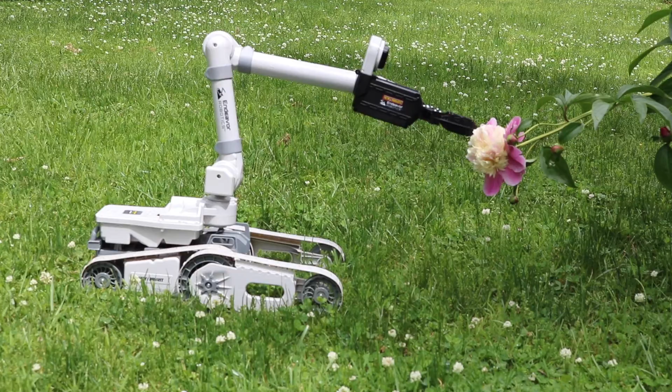Mobile robots often need to move from place to place in order to do their jobs. How do they keep track of the obstacles around them? How does this robot know what is around the corner before its sensors can see that area? The answer is that robots keep maps, so they can keep track of their own location and any obstacles that may be in their path.

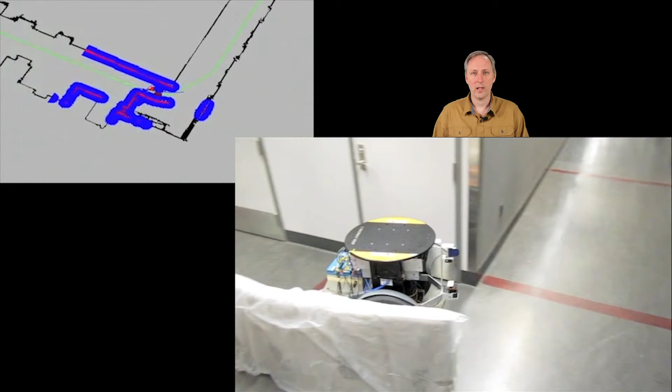In this episode, we will look at how robots sense obstacles and determine their locations, as well as how they store this information for later use. We'll do all this using the math you already know: geometry, trigonometry, algebra, and a few concepts from physics. This lesson will cover some ideas from probability, so you'll definitely want to take notes.

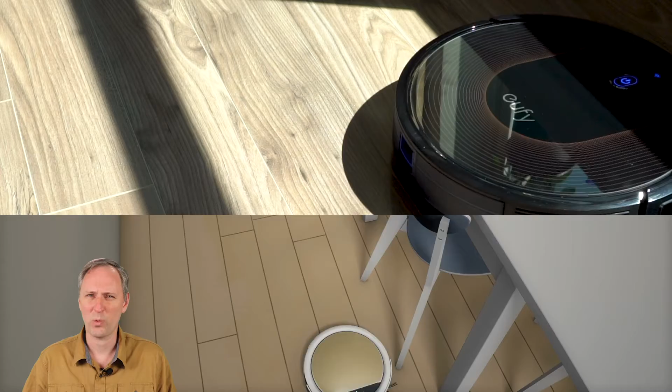Robots must be able to sense obstacles and store the location easily for later use. Robots working around the house need to avoid furniture and walls, and must remember how to get from the living room to the kitchen without having to explore the whole house.

In many cases, the environment will have some elements that change, and other elements that remain constant for long periods of time. For the house example, the walls probably won't move. The furniture will move only occasionally, and your brother or sister's junk will be in a different place every day. How do robots keep track of this?

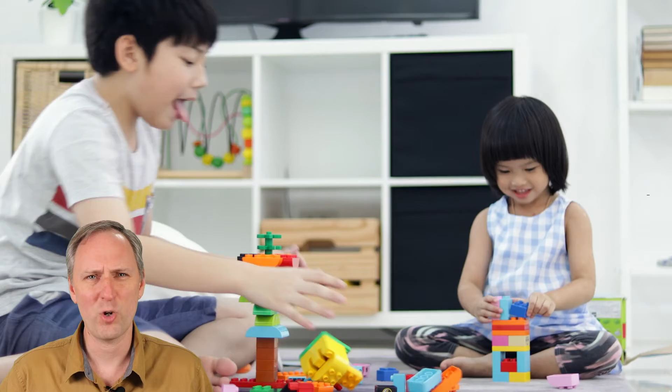Hey robot, did you get your stuff?

Let's start by talking about one of the common robot sensors, the Lidar, which stands for Light Detection and Ranging. In principle, this is similar to a radar, which uses radio waves. But with Lidar, the sensor will send out a pulse of light and measure the time it takes to get a reflection back, in order to calculate the distance to the object.

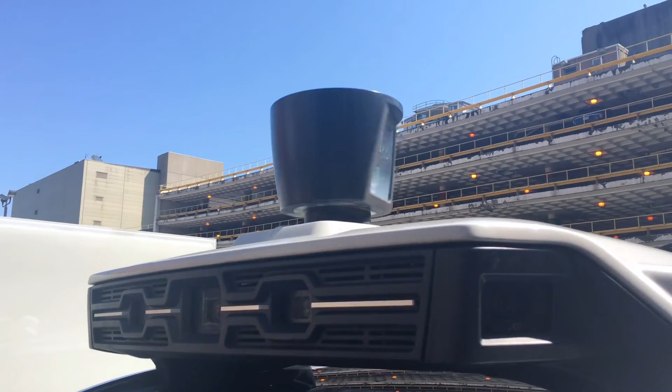Let's look closer at how Lidar works. The most common type of Lidar for robots is the scanning or rotating Lidar. This type of Lidar spins around at high speed, allowing it to rapidly get measurements in many different directions. If our Lidar system produces 4 pulses per revolution, it may tell us that there is an object 5 meters in front of us, 4 meters to the left, 3 meters behind us, and 10 meters to the right.

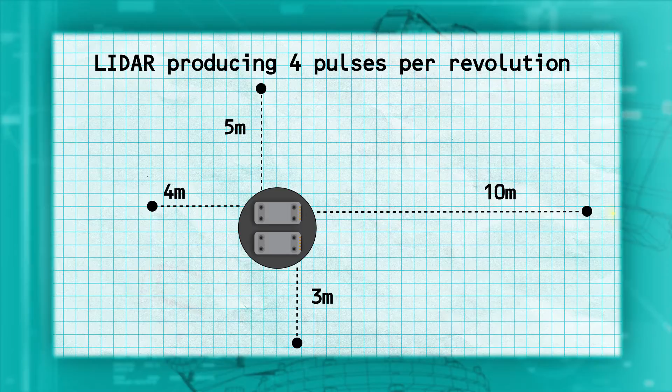However, most scanning lidars have many more than 4 pulses per revolution. A common low-cost lidar has more than 1,000 pulses per revolution. This results in a high resolution, which can allow scanning lidars to map the surfaces of complex objects and perform highly accurate surveys of such things as houses and other buildings.

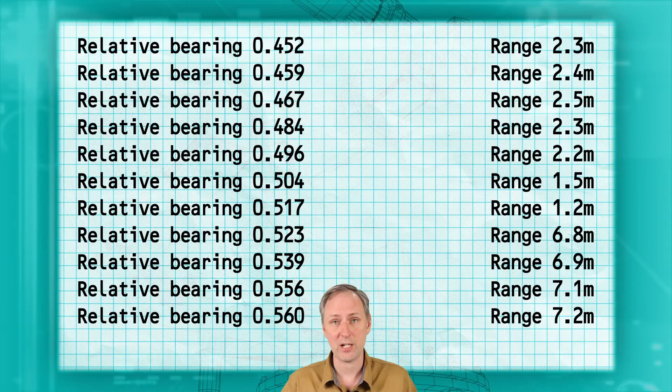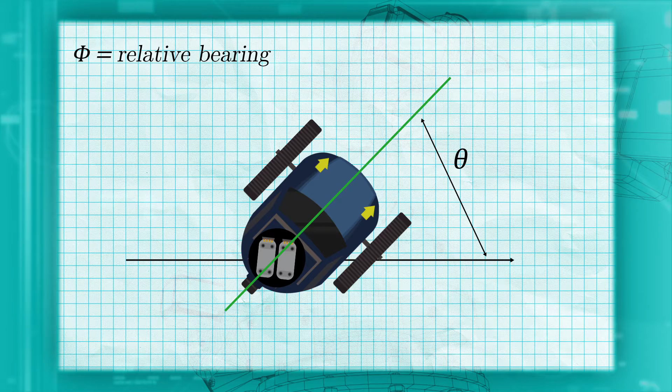What the Lidar produces for the robot is a list of directions, called relative bearings, and an accompanying distance in each of those directions. They are called relative bearings because they measure the angle between the robot and the object, rather than from some absolute reference, such as the x-axis. We'll use the Greek letter phi to refer to the relative bearings from the Lidar.

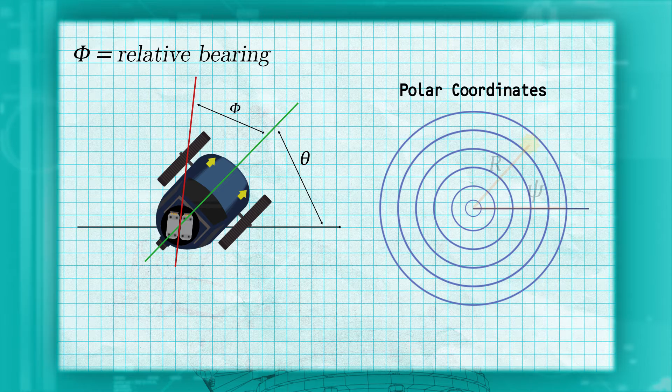The data from a scanning Lidar is essentially points in polar coordinates. If you remember polar coordinates, they consist of an angle and a range, exactly the same as the range and relative bearing the Lidar produces. As the robot moves around your house, it collects lots of measurements in this form, from all different types of objects.

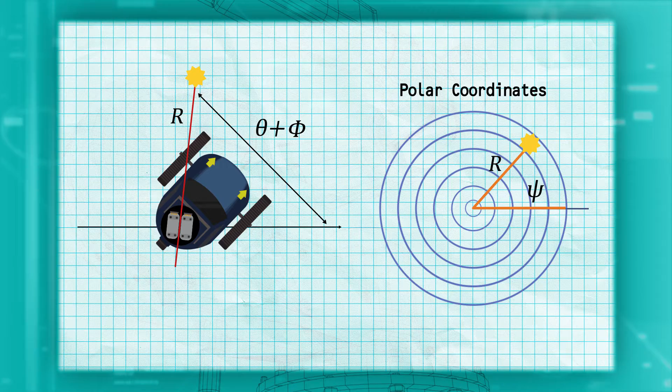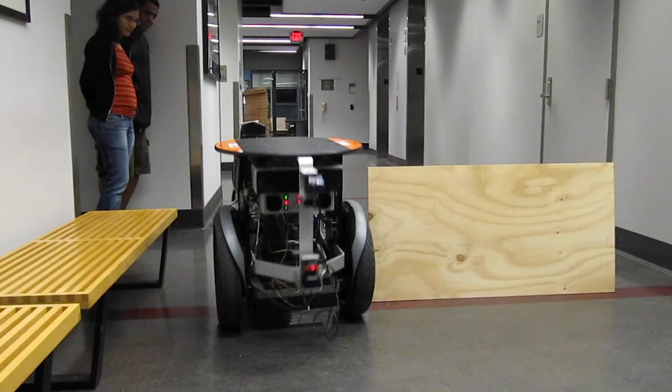But what does the robot do with this data? It could try to use it directly, stopping motion if the sensor detects an object in front of the robot within some minimum range, but that approach is better as a safety system, rather than a reliable method for long-term navigation. We need a way of storing the information the robot gets from each scan, so when it returns to the room, it remembers where the door and chair are, and that your sister's toys are still in the middle of the floor.

One way of keeping track of where things are is probably the method you thought of yourself. The robot should build a map, just like you would do mentally if you were trying to keep your bearings in someone else's house. You would keep track of where the walls, furniture, and other obstacles are located. The robot has a big benefit in this situation, since the Lidar is very accurate at measuring distances.

The way a robot makes a map is by dividing up the world into discrete chunks called cells. The robot treats each cell as a single unit. The cell is either all occupied or it's all clear, or possibly it's unknown, meaning the robot is unsure if the cell is occupied or clear. Using cells, the robot doesn't have to keep track of every single item in the room, only which cells are free and which are occupied.

If our robot senses a few objects to the north, how does the robot actually store this so it can use the data later? The easiest method is to simply store a grid. Imagine we make a grid with 50 centimeter by 50 centimeter cells. In our case, let's assume we had an object 10 meters away at a position of 6.1, 7.9. So we would mark the cell corresponding to the range 6 to 6.5 on X and 7.5 to 8 on Y as having an obstacle.

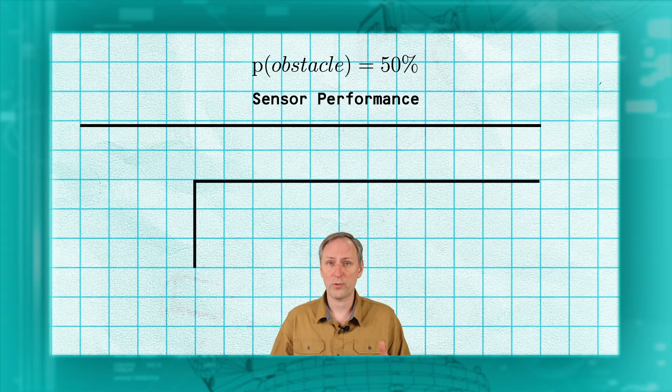One way to keep track of our belief that a cell contains an obstacle is to keep track of the probability. We will start off by assuming that any cell could either have an obstacle or not, with 50% probability of each. We will also need to know a little bit about our sensor capabilities, how likely it is to detect an obstacle, and how likely it is to correctly identify a clear cell. For any given part of the world, there either is or there is not an obstacle in it. Also, if our Lidar points at this cell, it will either get a return or it will not.

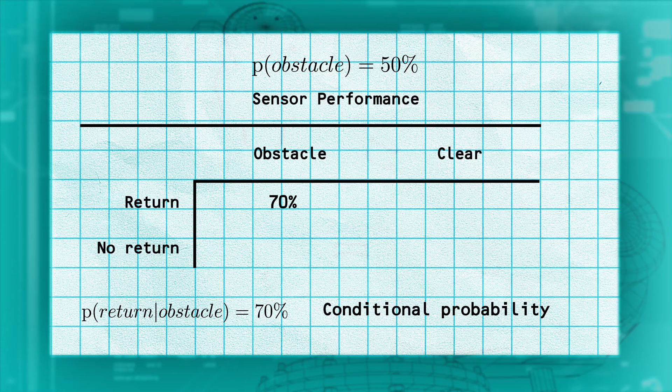Let's start with the cell that we know has an obstacle. Suppose our example Lidar will detect a return 70% of the time from that cell. We can write this as the probability of getting a return given an obstacle equals 70%. This is also called the conditional probability: the probability of getting a return conditioned on the fact that the cell has an obstacle. Since we either get a return or don't, the probability that we don't get a return from an occupied cell must be 100 minus 70, or 30%.

We can do the same analysis for a cell that doesn't have an obstacle. Suppose our Lidar will produce a return when there isn't an obstacle 15% of the time. We can write that as the probability of a return given a clear cell is 15%.

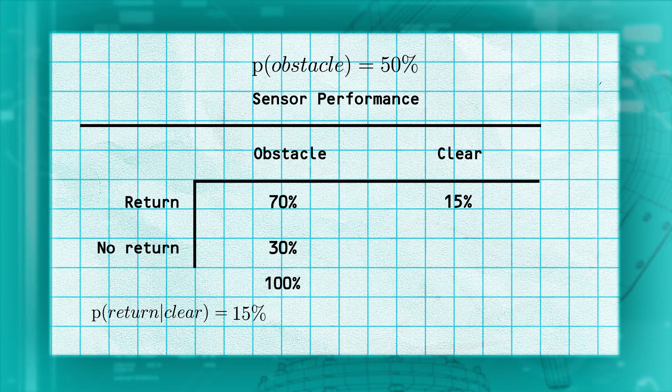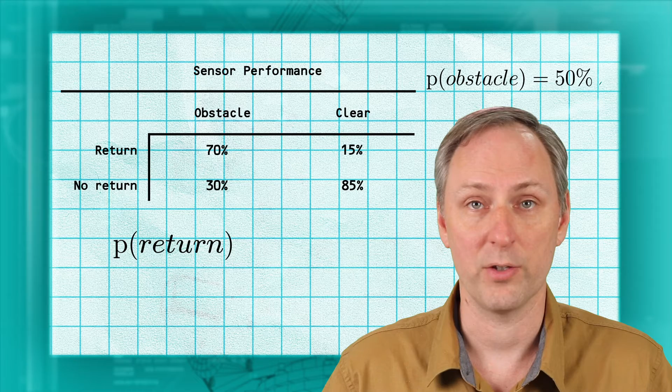Just like the first case, we also know that the probability of not getting a return for the same cell must be 100 minus 15, or 85%. Now we will use these probabilities to calculate two other terms, the total probability of a return and the total probability of no return.

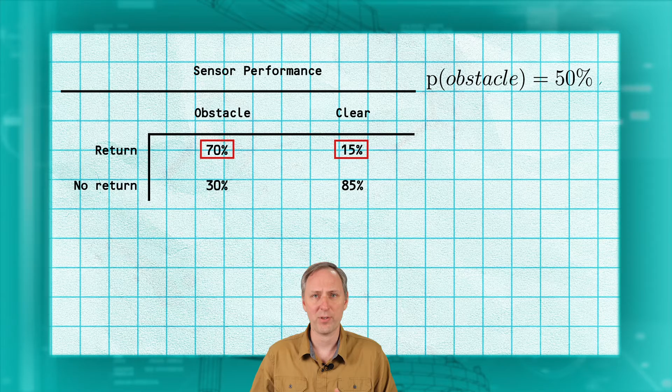Since we know there are only two options for our cells, they can either be clear or they can contain an obstacle, we know that if we have the probability of a return given a clear cell and the probability of a return given an obstacle cell, those account for all the ways we can get a return. The total probability can be calculated by taking the sum weighted by the probability of each case. Remember that the probability of a clear cell is 1 minus the probability of an obstacle cell, in this case 0.5.

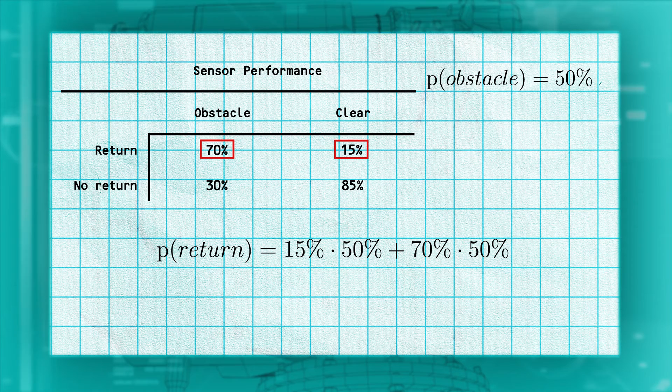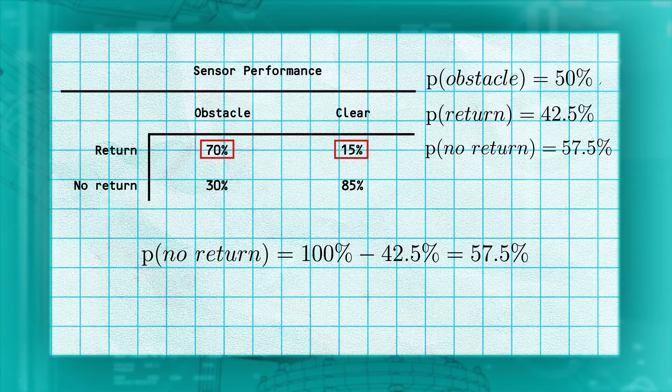Substituting in, we find the probability of getting a return in all cases is 42.5%. Since we must either get a return or not, the probability of no return is 100 minus 42.5, or 57.5%. Now we have everything we need to update our cell value. We'll use a formula you may not have seen before called Bayes' theorem. We won't get into where this comes from, but we will walk through how to use it.

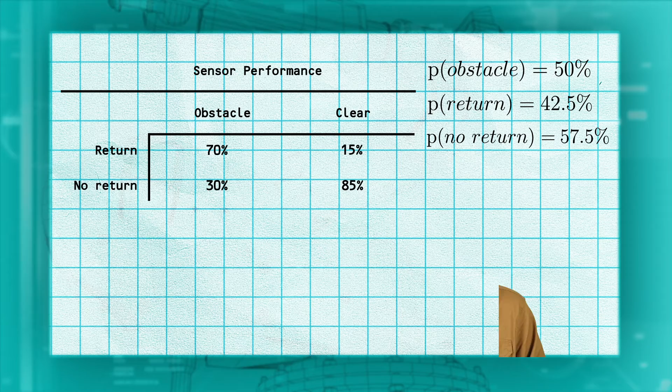The theorem says that the updated probability that a cell contains an obstacle is equal to the probability of an obstacle based on whether we got a return or not, multiplied by the current probability of there being an obstacle, divided by the overall probability of a return.

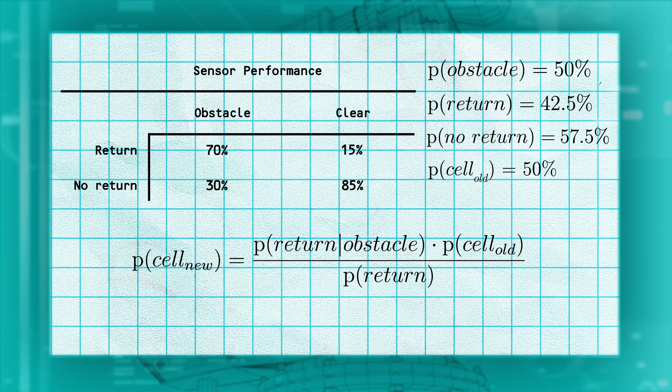Looking at our cell with an obstacle and an initial value of 50%, let's calculate our new cell value. Since we had a return, we multiply our current cell by the probability of getting a return given an obstacle, which was 70%, and divide by the probability of getting a return, which was 42.5%. In this case, we end up with a new cell value of 82.4%.

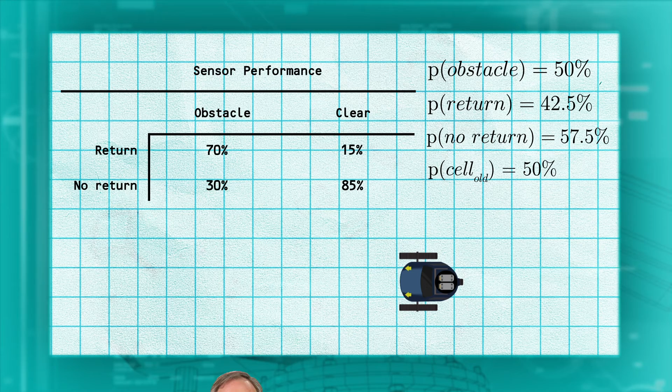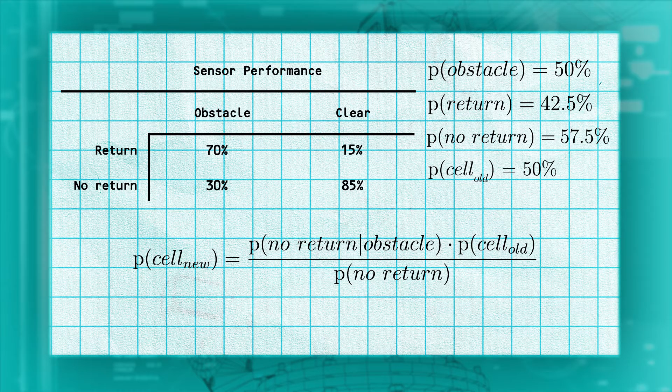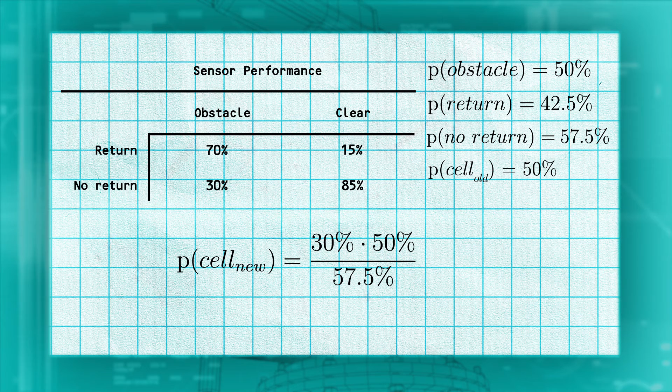For the cells we are clearing, we perform the same process. For this cell, between our obstacles and the robot, we know the LiDAR beam went through it without a return. Returning to Bayes' theorem, we again want the probability that the cell is an obstacle, given that there was no return, which is equal to the probability of not getting a return given an obstacle, which we know from our chart is 30%, times the current value of our cell, which is 50%, divided by the probability of getting no return, which we just calculated to be 57.5%. Combining and solving for this gives us 26%.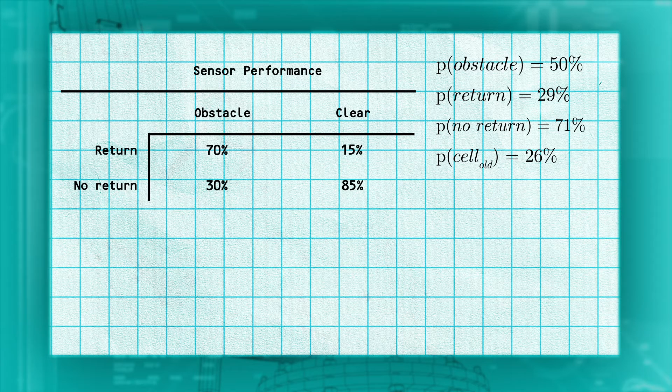If we were to have another beam go through the same cell in the future, we would perform the same process. But instead of starting at our initial value of 50% for the cell value, we would use the new value of 26%. In this case, a second measurement showing no return would cause the probability to drop further to 11%.

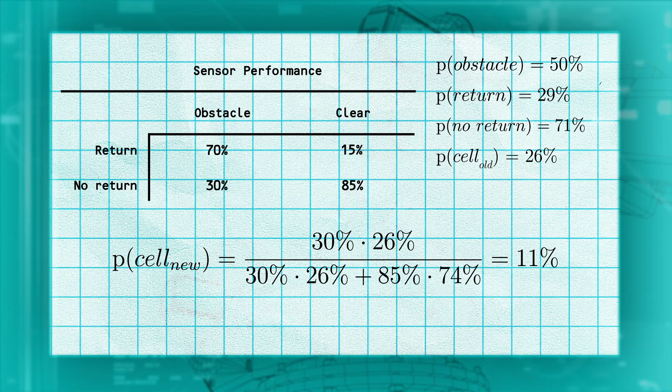In this lesson, we discussed how LiDAR works and what type of measurement it provides. We also discussed a method called the Bayes' theorem for storing map data. It allows us to keep track of our certainty that a map cell is occupied. We now have confidence that errors in our measurements won't erase walls that are really there, or add phantom obstacles where there aren't any. Now, get your pencils ready for this week's challenge questions.

Question 1. The robot gets a LiDAR return from the bottom right cell. Which cells will have a change in value? Question 2. What are the updated values for each cell? Question 3. If the robot gets a second return from the bottom right cell, what are the updated values now?